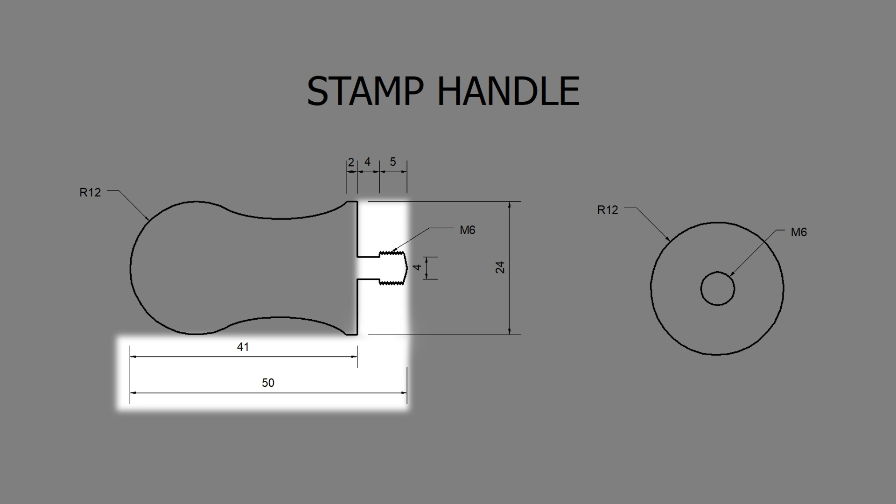Secondly, I would keep the measurements of the length the same. So a total of 50mm, but the main handle just before you get to the shoulder is 41mm. I'll talk you through why that is a little bit later. But yeah, it's quite interesting with regards to the domed part, the domed end.

With the domed end, this is actually a two-part process if you've got a dome part of your design. So if I show you here on the screen, you'll see that the lathe would cut the first bit, which is the thread part and the side profile, and then it would part it off all the way across the end, leaving a nice flat end.

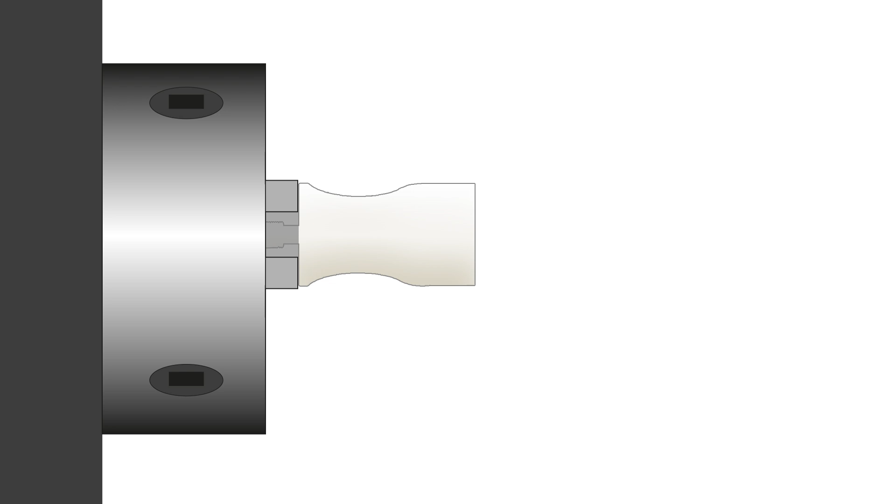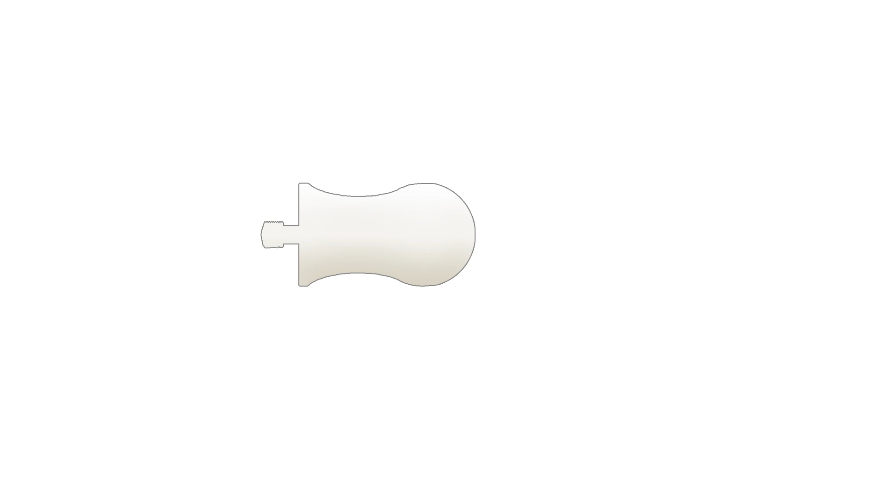And then essentially what you would do is turn that around in the lathe, and we're going to screw that into a little jig which goes into the chuck really nicely. Then you run a second program, which is the dome. I'm also going to show you how to create that dome program as well. So that's the reason really why we would keep the measurements the same, because it just makes our jigs work and everything will work really nicely.

So opening up TS Design, you should all be familiar with how the program looks when you first open it. It's a standard A3 document, and you've got these little dots every centimetre. What we're going to do is change the way this looks so we can get it pretty much looking like what Boxford Design Tools looks like. It makes it a lot easier to design these kind of side profiles for the lathe work.

So first thing we're going to do is in the top here, there's a layout button, the little blue box. If we hit that, you can see that the document is at the moment a standard size and classed as A3, and that's where you would have picked all your A sizes. But for this, we're going to make the document size the same measurements as our metal. So if we go down to user defined and click on that, you can now input the X and Y dimensions for the material size and the design guide.

Design guide is literally just to help you on the screen, so I normally duplicate both of them in here. With regards to the length of the material we'll be using, we will be doing a 50mm billet by the thickness of 24mm. So I'm just going to repeat that in these boxes and hit OK.

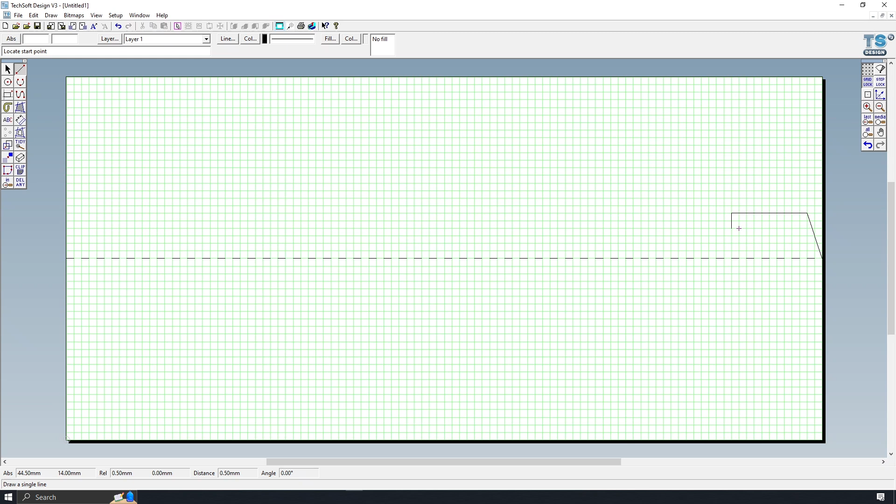The threaded section lasts for 5mm, so I'm going to go across for 5. Just making sure it's nice and straight. That's it. And then it goes to a thinner section, which is 4mm. So we're only going to go to 2 on this side. So it's 1 and 2. So it's only 1mm down. That's right. And that will go for 4 mils. That's 4mm. Then the shoulder of the handle goes all the way up to the top, and then there is a 2mm rim, so there's 2mm there.

So like I said earlier, on the other end, where we're going to have a dome, we're not actually going to draw in the dome at this stage. That's going to be for the second program we're going to run. So for this one, we're going to actually just leave it nice and flat. If we was to do a perfect dome, it's a radius of 12 mils. So actually what I will do is I will do a line from this edge to this edge, just so I can know where my 12mm dome will end. Okay.

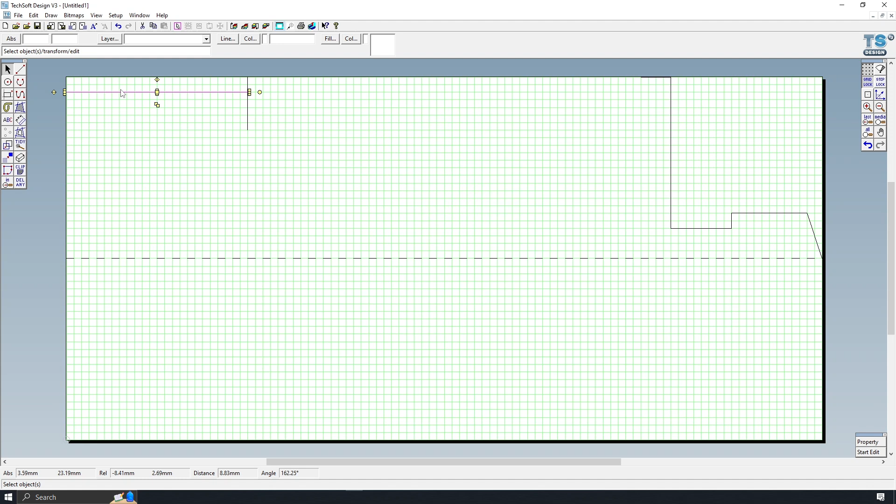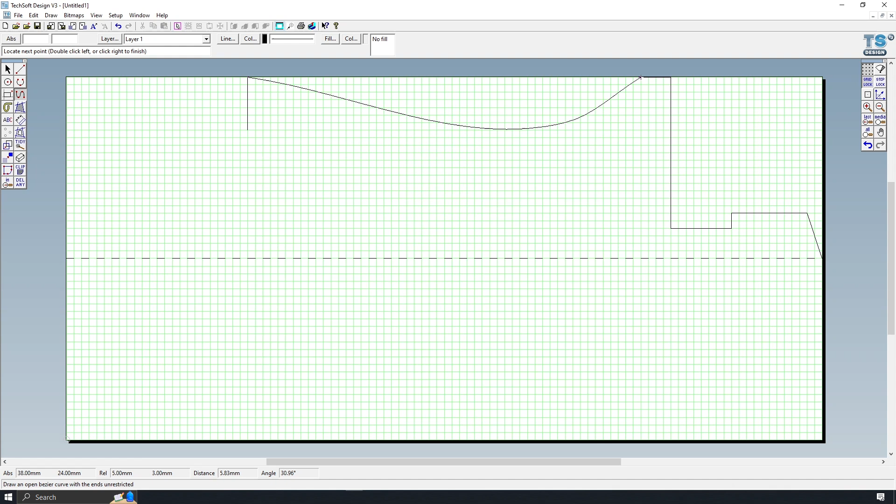So if my dome ends there, I know from this section to this line here, I can start doing my curved arc. So for this one, I normally pick the curved path tool, and I'm going to select just there, work out how far down it will go, and then tally it up just there. That temporary line there again, just as a reference, I'll delete it now. Okay, so we've got the shaft part, the threaded part, the shoulder, the curved part, and we just need to box this off now at the end. So I'm just going to go straight across and then straight down.

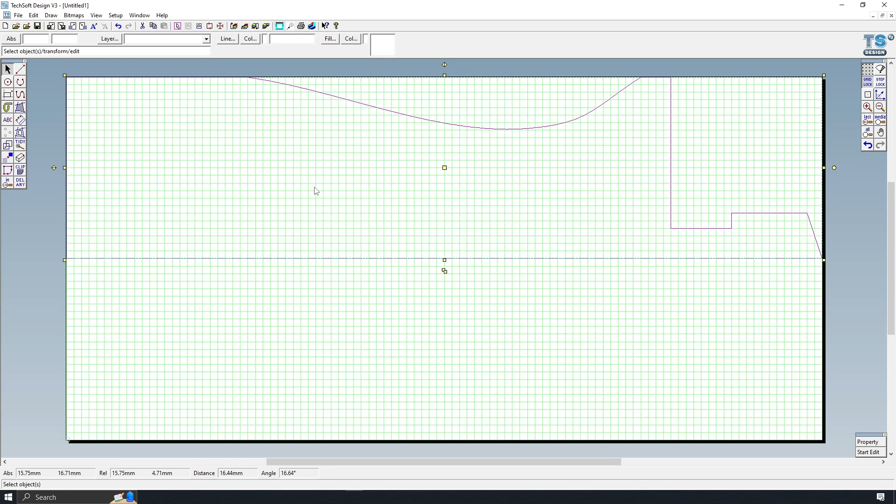So essentially this is all done. There's a few little tiny steps to do, but it's quite hard to see the profile of just half of a side. So what you can do, if you select it all and group it—I use Control and G to group—you can then copy the file, drag it down to this bottom half, and just flip it.

So that will give you a really good view of what it would look like with both halves completed. By using this mirrored image, you can also double check your measurements, physically drawing lines to lines just to make sure your measurements are exactly what you need them to be. It's a great way of double checking. Just make sure you delete them after you've drawn these lines.

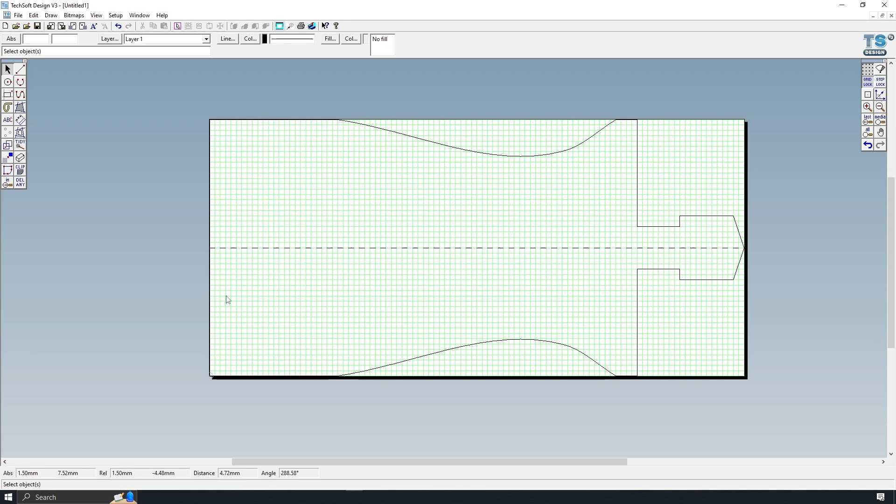For the actual DXF file, it won't actually work if you have this bottom section in the image. So I'm just going to delete it again, and now I'm going to ungroup it with Control and U for this purpose. So we've got our lines separate.

The last thing to do with this file before we can export it as a DXF file is that all of these individual lines are separate—they need to be one continuous long path, excluding that center line. So what I'm going to do is select it all, but then deselect that center line so everything else is selected.

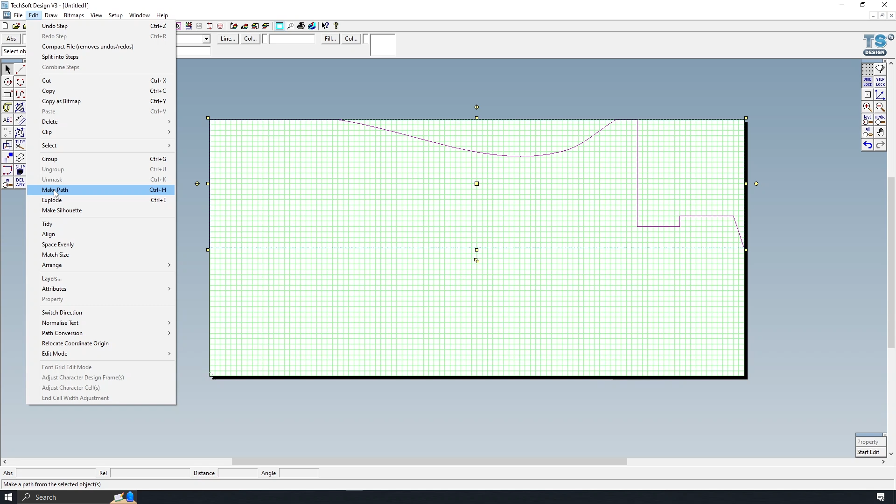There's a great tool up in Edit. If you go down and find Make Path, or the shortcut Control and H, it basically warns that the Make Path function combines selected objects into one path, and that's exactly what we want. So I hit yes, and it says Make Path Complete. Now if I select one part, the whole thing is just one line, which is exactly what we need.

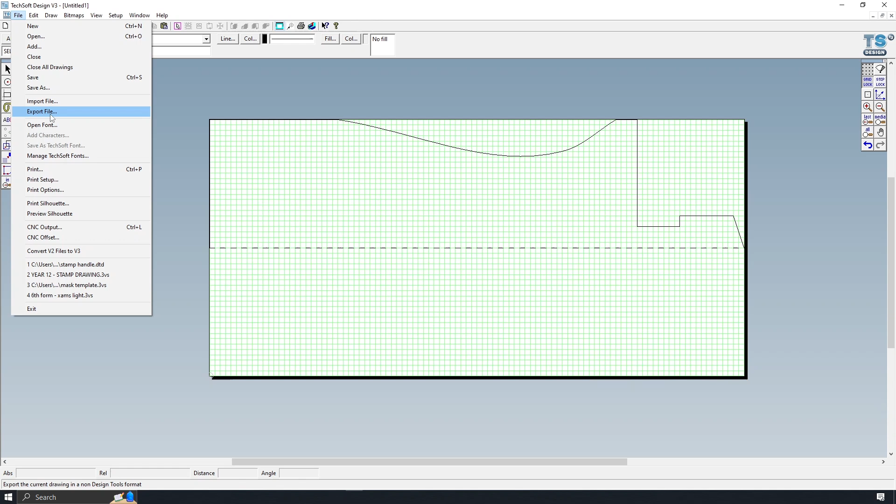And now that file is ready to export. So to export this file correctly, you're going to go up to File and find the Export File function, and find where you're going to save this piece. Just on the bottom here, you can select from multiple different file types, and what we're looking for is the DXF file. So select that.

Call it something practical, so stamp handle. Okay, and hit save.

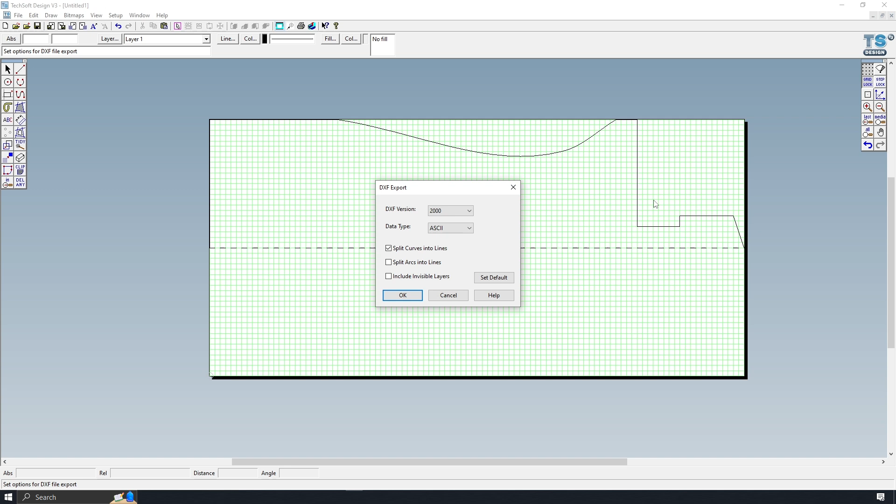The most important part of this is the curved parts won't function properly if you don't highlight split curves into lines. So I'm going to select split curves into lines—everything else you can leave exactly the same. Just make sure you've ticked split curves into lines, otherwise you'll get part of it imported and nothing else will work. So then hit OK, and our file is exported safely.

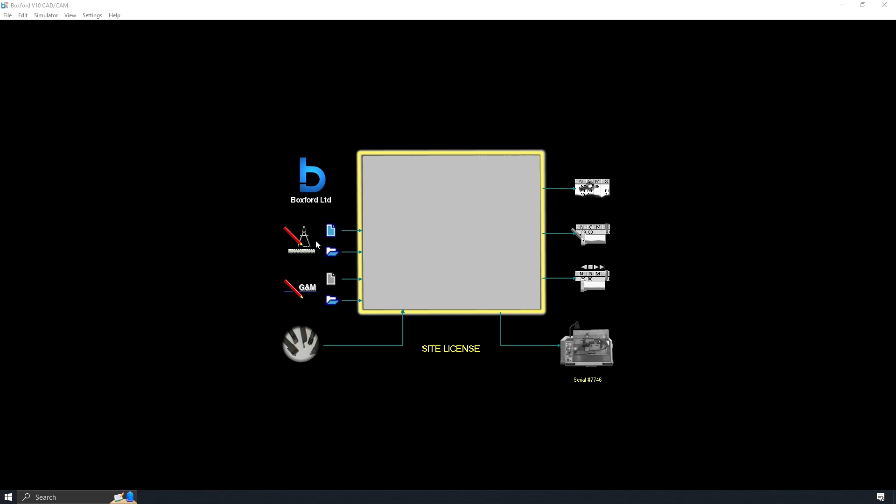So for this one, we want to open the imported DXF file. So we're going to hit open on the drawing here. At the moment, we've got the folder that we saved our drawing to, but nothing's there—that's just because of the type of file. We just need to bring up the drop-down box and select DXF imports, and there you can see the stamp handle. Click on that and hit open.

It's brilliant. So this is a part where we just need to give it a little bit more information if it hasn't dragged the right bits of data from 2D Design.

So first of all, it just says component information. I might call this Year 12 stamp handle, created by Mr. Fay. The outside diameter is picked from our drawing, so that's fine. Inside diameter is only if you're working with a previously bored bit of metal or a tube that has a hole running through it. The length we know is 50 millimeters, everything's metric, and the hole depth we don't need to worry about. We'll hit OK.

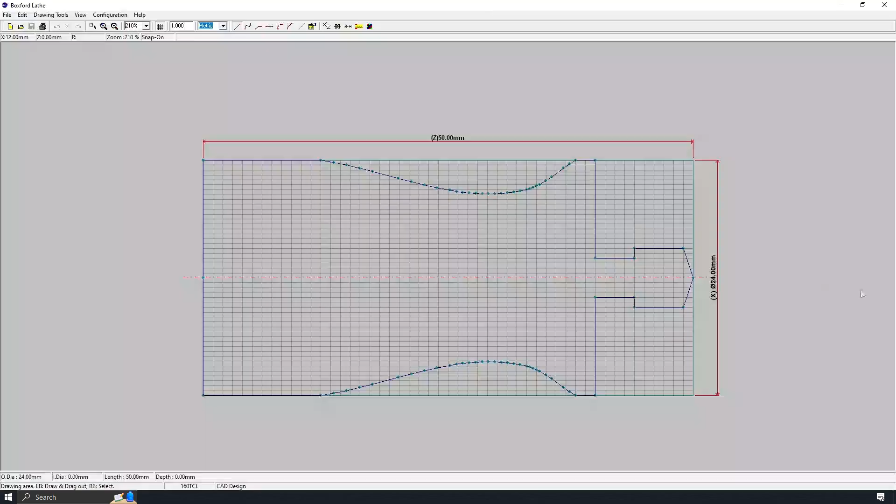Now you can see our 2D design file has been created in Boxford Design Tools, and this is going to be a really nice way of quickly turning it into a G-code file to run on the lathe. Like I said at the start of the video, the threaded part isn't actually there - this is just a block of 24mm thick acetal. We need a way of adding that thread onto this edge.

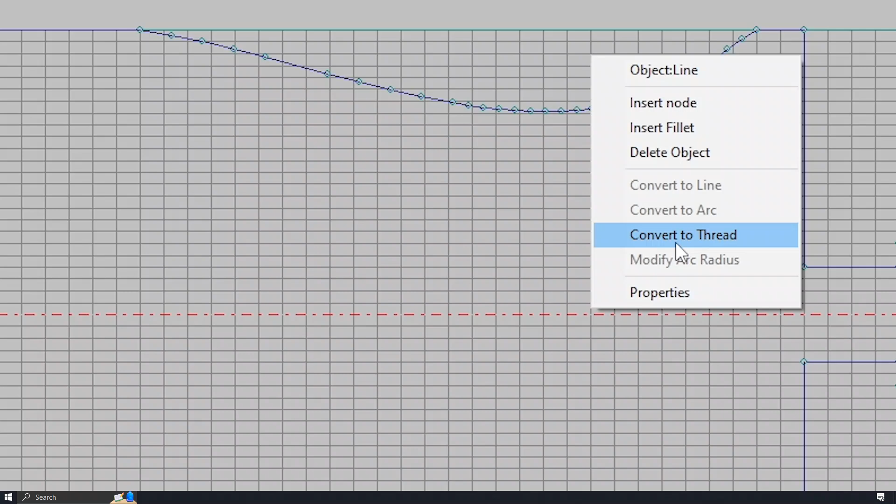So really nicely, if you right click on the line where we want to add the thread, there's an option that says convert to thread, and this is where we can add in a bit more detail. For a 6mm thread, the pitch will just be straightforward 1, so we're going to do 1 mil thread pitch, and then thread specification.

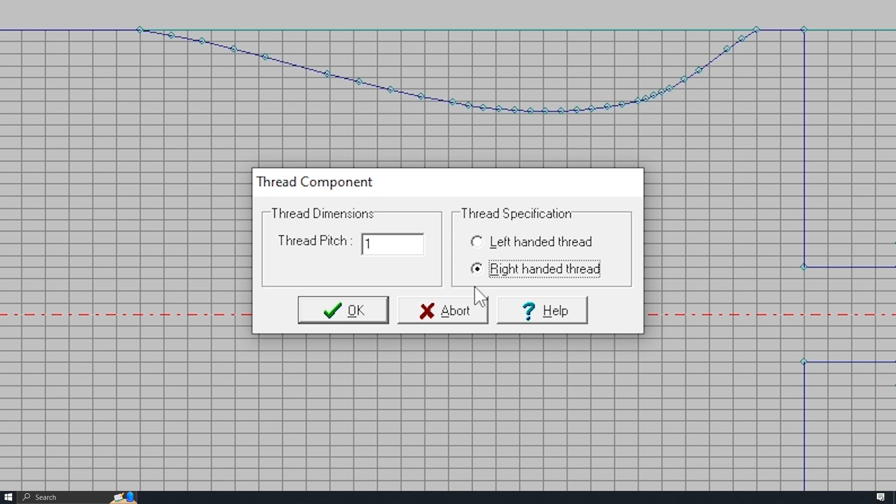You can have a left-handed thread or a right-handed thread. Left-handed threads are normally used in a process where you don't want it to undo while it's being used - quite commonly your pedals on a bicycle would be left-handed thread, so as you're turning the cranks and riding, the pedals won't just fall off. But for this we just want a common right-handed thread, so we select right-handed thread and hit OK.

Now you can see that the thread is visualized just on the edge here, and I know that's all to the right measurements for the M6 negative thread. The dotted line just to the side of the thread is a clearance zone - when the lathe cuts the thread, there's going to be part of the tool sticking out on the side, so there needs to be a little bit of clearance. You can see in our file that the clearance comes up a little short before our line, so we know we've got enough space there.

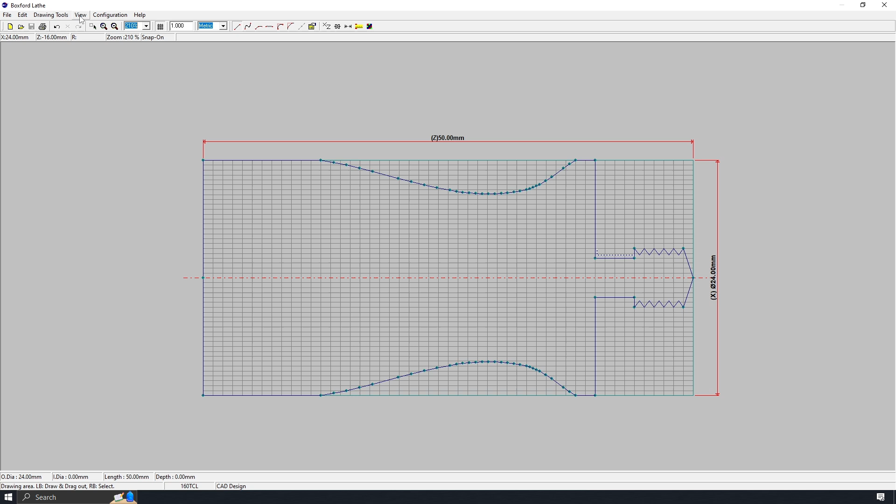Now we've got this drawn up, we're able to use Boxford to give us a 3D representation of what it will look like. If you go up to View on the top menu and go to Launch 3D Render, a window will appear, or it will get you to save the file temporarily before it throws up this window. It's spinning aggressively, so just press the letter F on the keyboard and it will freeze it. I'm going to bring this up nice and large and drag around.

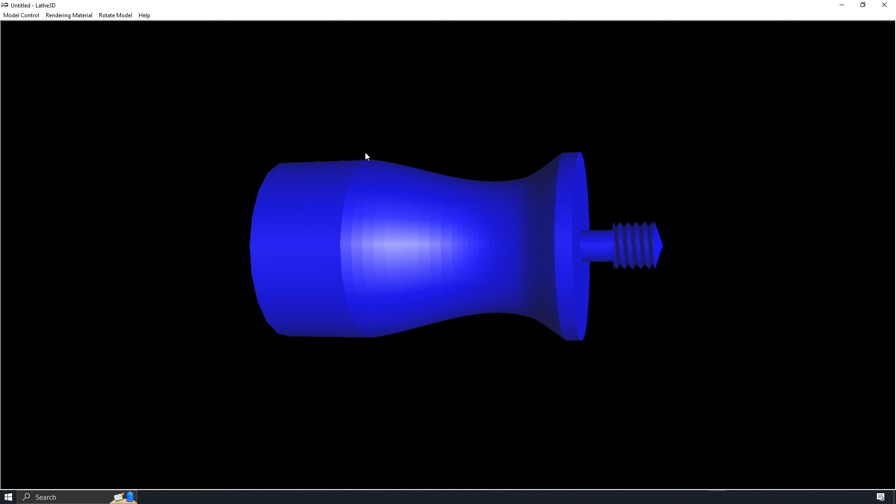Now you can see we've got the threaded section, the thinner 4mm shaft area, the nice shoulder which goes right up to the edge of the piece, then the arc, and then the flat side, which, as I said, we're going to do as a separate profile - I'll show you how to draw that out last of all in this tutorial. But I'm happy with that, so we can shut that down.

Before we hit process billet, where we'd process this into some G code, I'll explain one problem we will hit. If you imagine a cutter cutting all this material away on a spinning bit of plastic, and it gets down to this end where it's going to do a final part off - at this 0 line, that's exactly where the chuck will be. So we don't want there to be any nasty cutting happening with the cutter going straight in and hitting the spinning chuck. We want to give a bit of extra space onto this end.

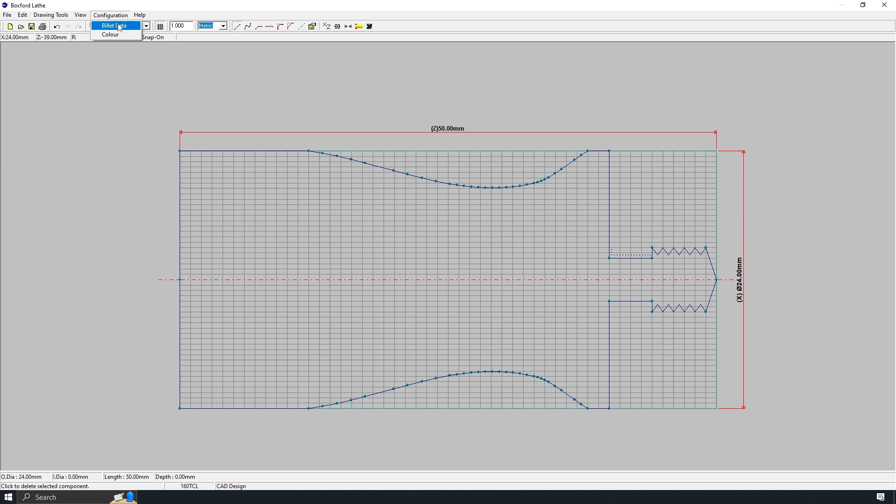Normally I round the number up - at the moment we've got 50 millimeters length, I'd add another 10 mil onto there, so a nice round number of 60 millimeters. So if I go up to configuration here and go to billet data, we can enter the length and diameter again and make some changes. Where it says 50 millimeters length, we're actually going to go to 60 millimeters now and hit OK.

I'm going to zoom out a little bit, and now you can see it's added 10 millimeters just on this end, so there won't be any crashes - there'll be a nice little bit of material before the chuck.

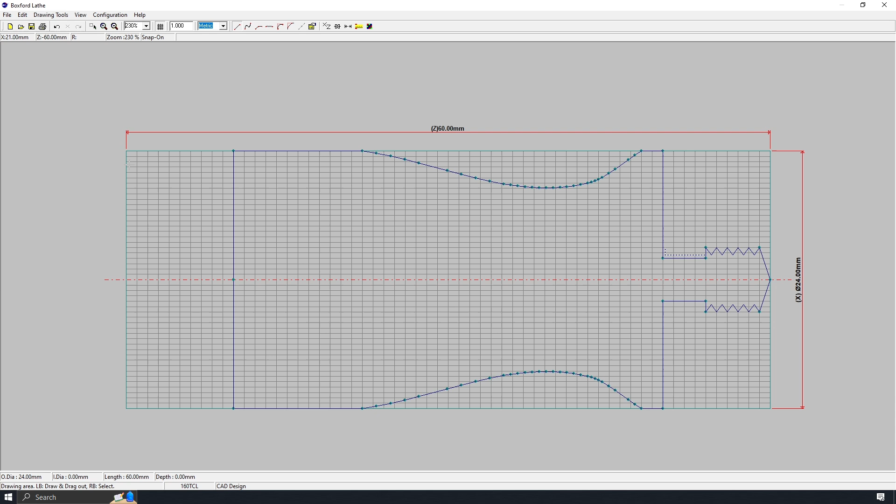Now we are ready to process the billet, so we go up to File and Process. Basically it's saying, if you haven't saved it already, I've made some changes, so do you want to save it? I hit yes.

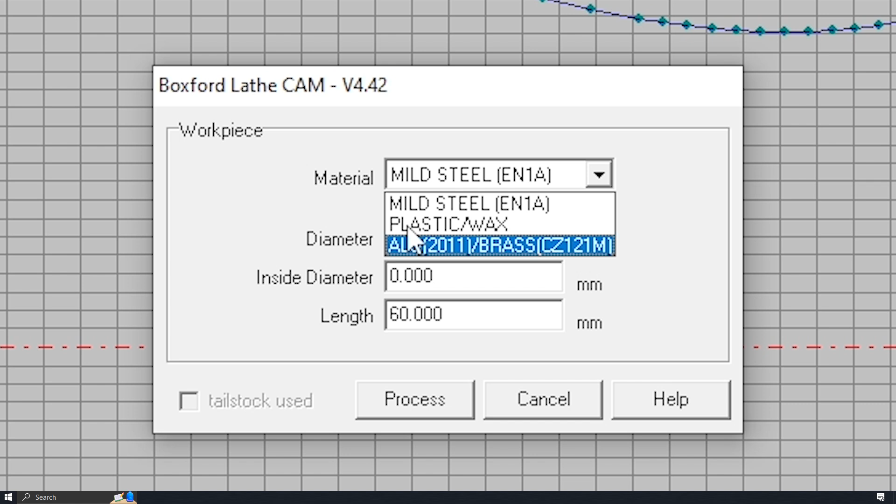So then this little window comes up. This is where you get to add a little bit more data so the lathe knows what it's dealing with, even regarding material. So you've got a selection of mild steel, plastic or wax, and aluminium and brass. So each of these different settings will set the lathe up in different ways.

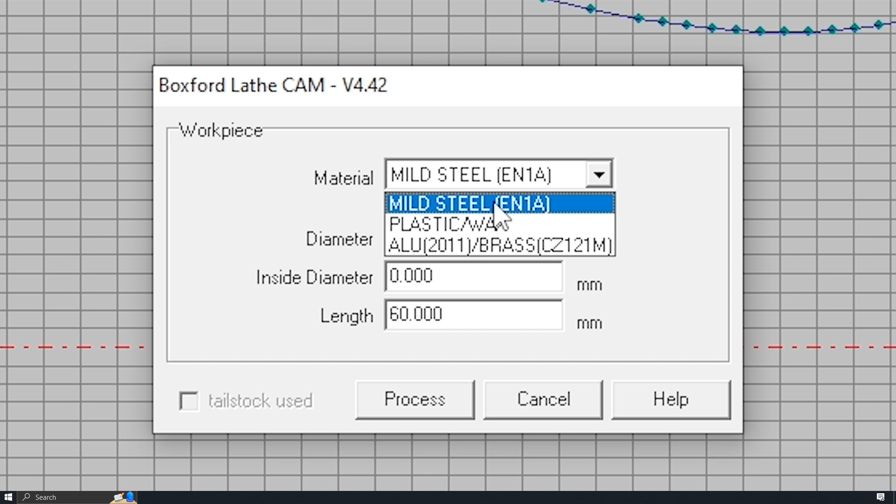It'll do different depths of cut, different speeds for feeds and cutting speeds to match what's needed. So with something soft like plastic, which we're using, it'll do more of a chunkier, thicker cut, rather than mild steel where it'll do very fine cuts, because obviously it's a lot harder material.

So we hit plastic, we just double check diameter and then length's okay, that's good, and we're going to hit process. It's going to ask you to save the G-code file. I've obviously done a test before, so it's asking me if I want to replace it.

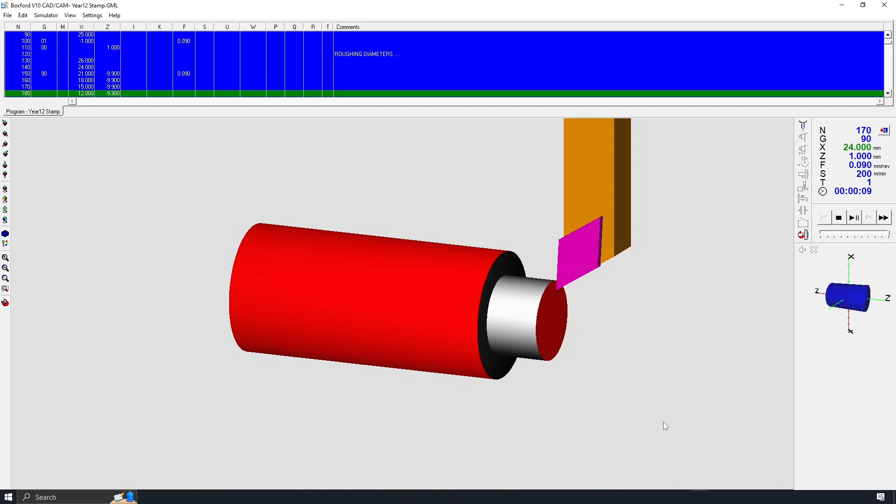I hit yes. So now it's going to run a program, and you're going to see it on the screen on the visualizer of all the cuts it's going to do. At the time it's doing this, it's writing all the G-code out at the top here.

So you can see it's done its roughing cuts and it's done its fine finishing cut. It's clearing some material out with the parting tool, then it's got a left-handed cut going there. Thread cutting tool is doing the thread.

Okay, and then it should be the final parting off with the parting tool, and then back to the original tool. So during all that time, it's written all the code out.

As an example, to do all of that process, if I go all the way down to the bottom, you've got 1,950 lines of code to make this to where it's at the moment. So you can sort of see the program was doing a lot there to create the code.

But it hasn't thrown up any conflicts. It hasn't said, well, a certain tool couldn't get into a certain area. So we're all nice and safe with that.

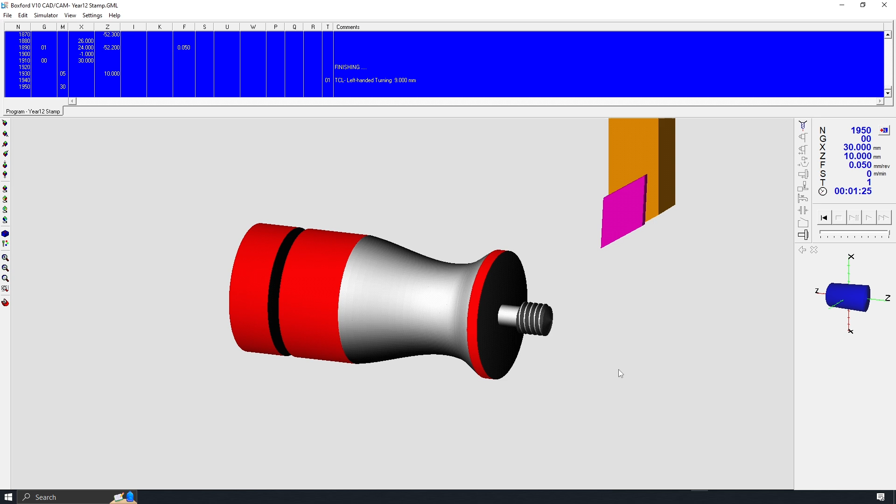So we can close this one down. And you can see the little visual of our files come up in the middle, which means it's all ready to send to the lathe. So down in the bottom here is a manufacture little lathe button. You would click that to send it to the lathe, and we'd get manufacturing with this part.

But like I said, we've got the other part, the domed part that we're going to create. So for that, we're going to go back to 2D design, and I'm going to show you how to create that now.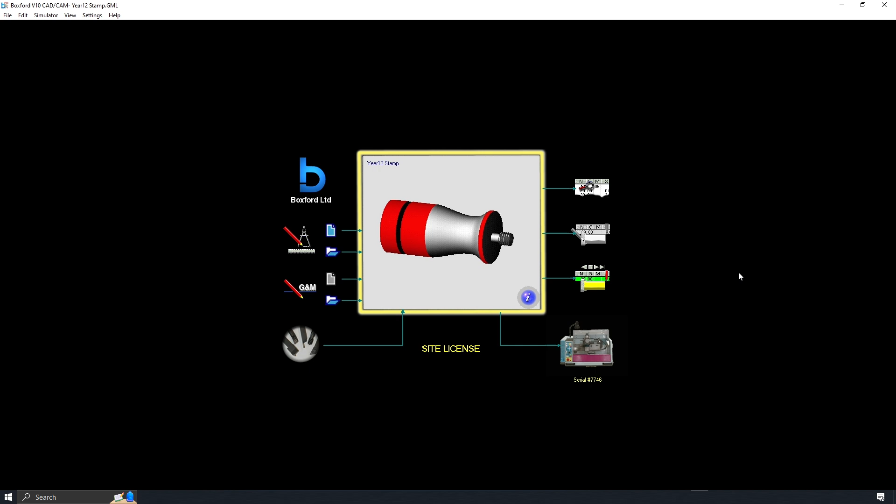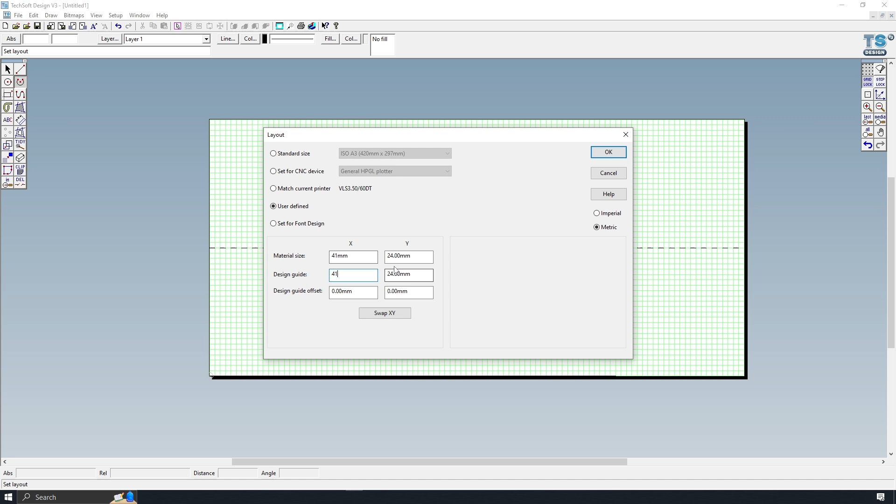So we're back over to 2D Design, and I've got my file laid out exactly how I did before. But actually for the domed end, for this file, we're actually going to change the size of the document, because we actually want it to be a length of 41 for this one. This just allows everything to sit in our little jig in the lathe correctly, and it cuts the right amount off. So 41.

And as I've adjusted that to 41, I'm just going to change the length of the center line. There we go.

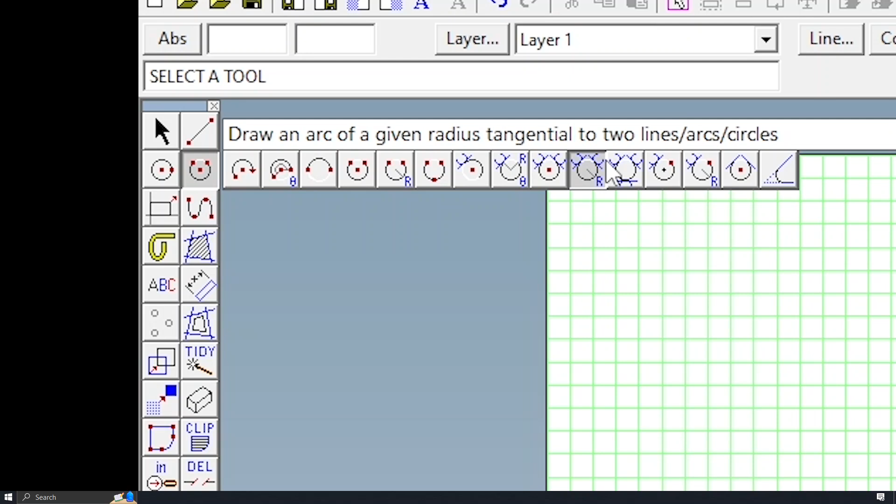Okay, so for the dome, it's going to be a straightforward curved line just from this end. I'm going to show you a nice easy way of doing that. So with regards to the arcs button just on the left here, if you press and hold it down, it'll give you a lot of different options. And we're going to go to the draw a semicircular arc locating endpoints.

Okay, so as an example, if I was to draw from the bottom to the top, you can see it's going to draw a really nice arc to the measurement that we want. But I want it to be exactly on that 12mm arc line.

So I'm going to use my line tool to find my 12 mils. So it's just about there. I'm just going to delete that one. And now I know where I'm going to drag from and to. Actually, if I make this longer, because we're going to do it from this bottom side as well.

So now we're going to click that arc selection that we made earlier on.

So I'm going to find right at the edge of the material, click there, and drag up to the top. Brilliant. And then that first line, I'm just going to delete because we don't need that. Let's have a look - that's really good.

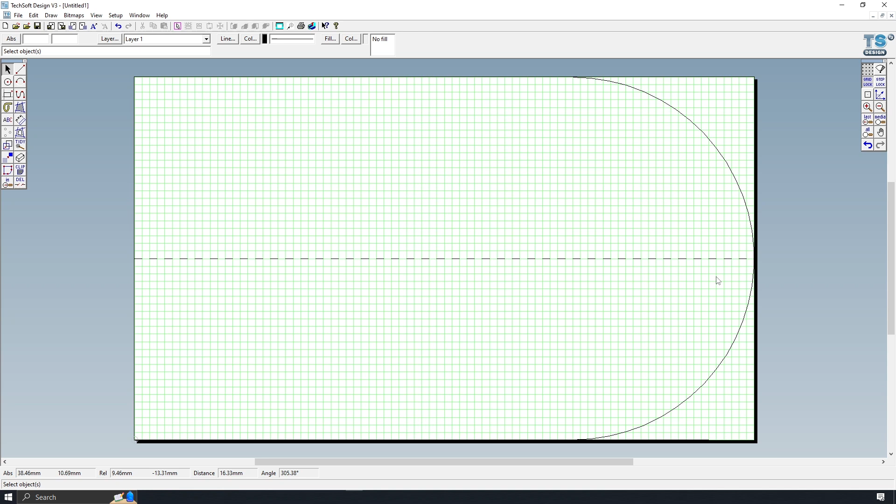And just one other thing - we're not actually going to need this bottom part again. So in the delete button at the bottom, if you hold and go over to the one that has two little red lines inside and select that, you should be able to go over to that other part of the arc and just click on it to make it disappear.

Last little amendment I'm going to make is just at the end of the arc - I'm going to add a straight line going for probably 2mm. It helps things work a little bit more efficiently. Let me just double check where it goes to - it goes to there, okay. So I'm going to go 2mm from that edge and just add another little line. You can see I've added another little section on there.

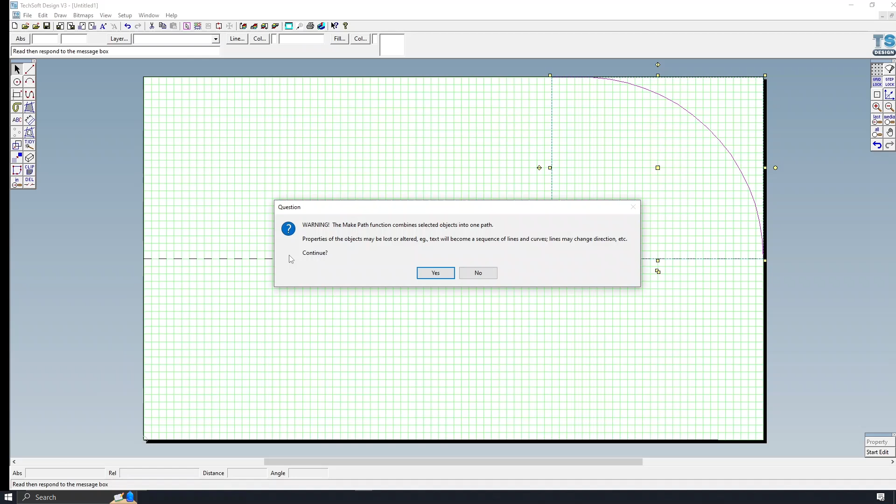As before, these are two separate lines, so we need to make them as one. I'm going to select both of them by holding down Shift and clicking both, and then we're going to go to Edit and then Make Path. Hit yes, and okay - so that's now one nice curved line with the extra 2mm line.

We don't actually need to carry the line down to the end, so it does actually just end there. It's something we don't need to cut any of this, because remember our profile's down here, so it would just be cutting mid-air. We don't need it to cut there. So that is what we need.

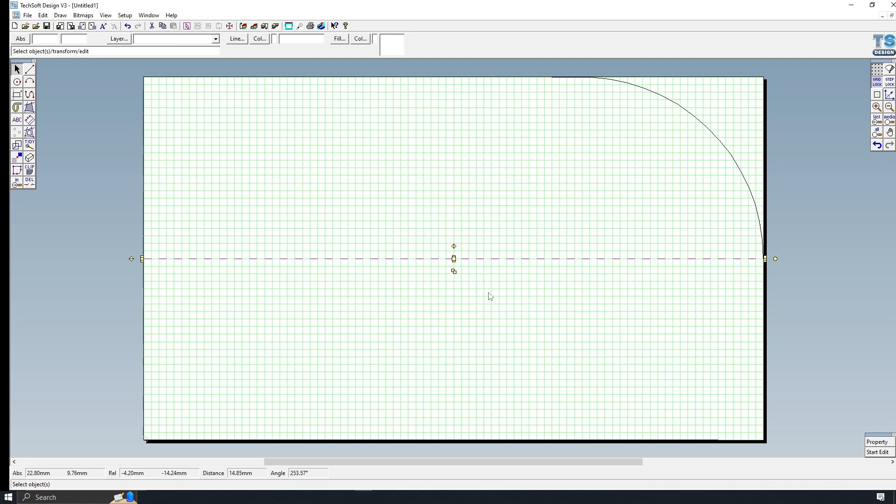Obviously our two lines aren't grouped, which is good, and we can then save that as a DXF file. So going up to export file, we're going to call it stamp dome or stamp handle dome. Okay, just make sure we're saved as a DXF file and hit save.

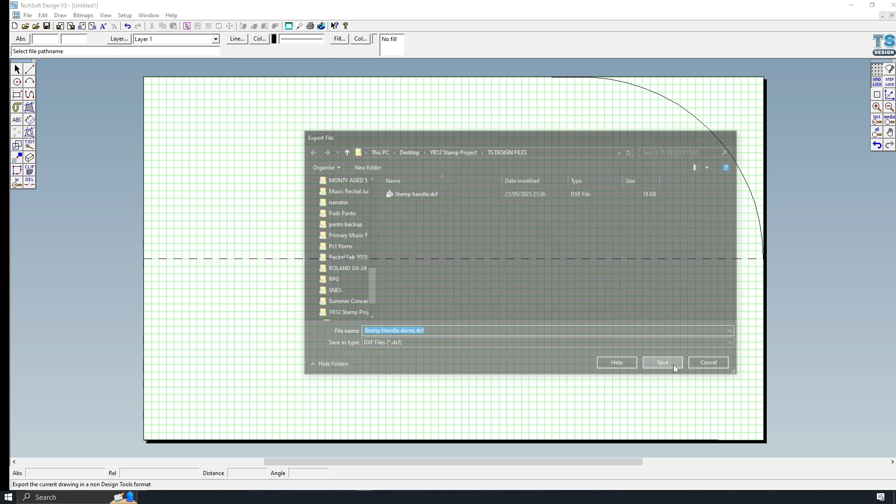Split curves into lines again - really important we do that one - and then hit OK. Brilliant. Now over to Boxford Tools.

So we're back over in Boxford, and we're going to open up the dome file that we've just created. We're going to find the DXF import and click the dome file. Okay, and we're going to call it stamp dome, created by Mr. Fay. Outside diameter 24.

Yep, so in the length it just says 14mm - don't worry about that at the moment. It's only because we've only drawn a dome which was the 12mm radius plus the extra 2 millimeter line. So don't worry about that at the moment. It says 14 - we're going to hit OK with this one.

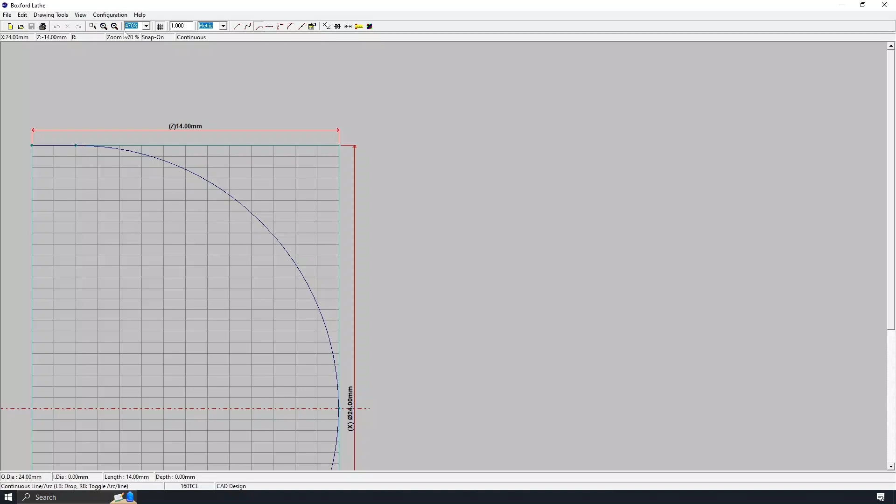And I'm just going to zoom out. So now you can see it's just got the doming part, which is the 14mm section, and exactly how we need it.

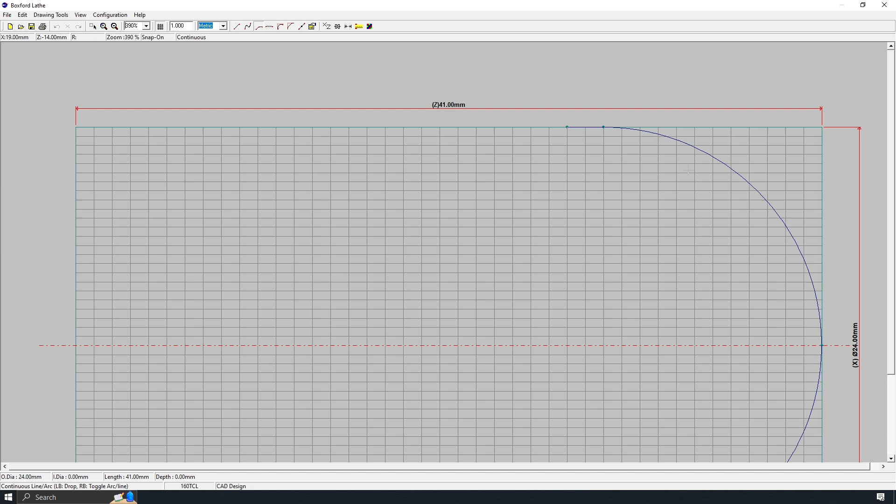For this, we're going to change now the length of the billet to 41, because we want the 41mm length to make the jig work. There we go - I'm just going to make sure I don't draw anything else.

Brilliant, we can do the launch 3D render again, so I'm just going to hit OK with that one. And you can actually see that it's just the domed end that we're working on. Absolutely fine.

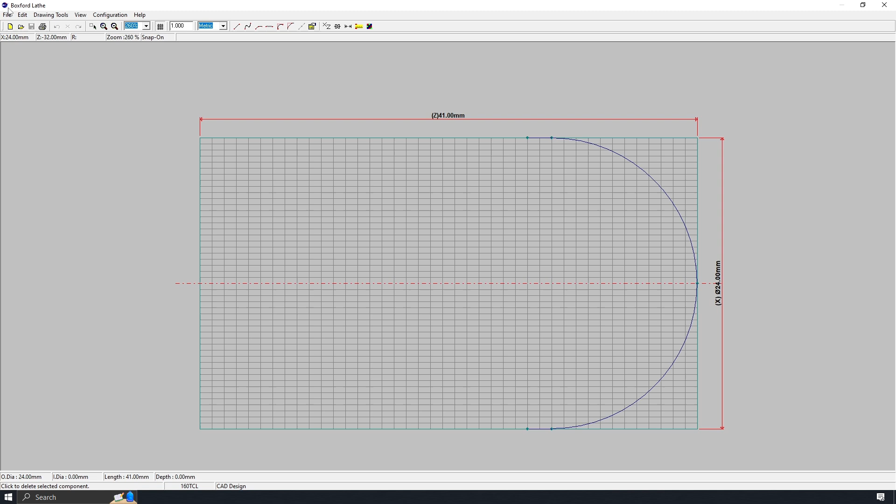And knowing that we're at 41 and 24, we're going to process this one with the plastic and wax at those measurements. Hit OK. And you'll see it run the program again.

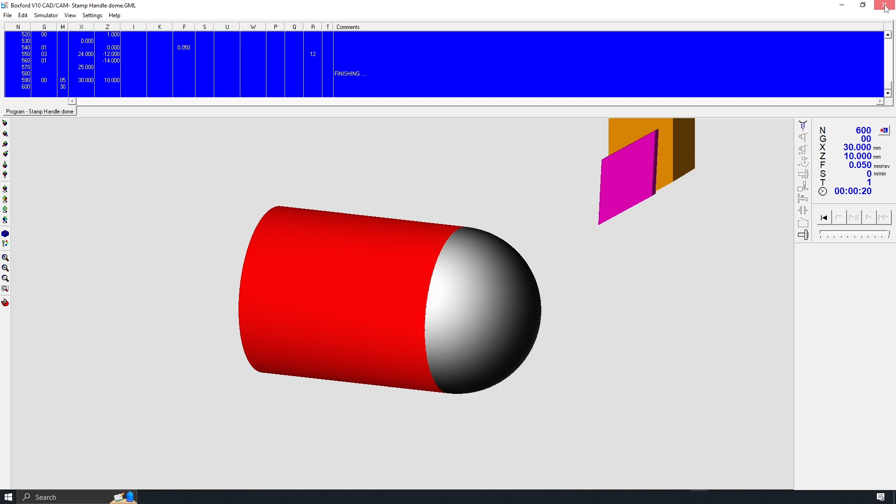So you can see it's created the file - just to do the doming, that's 600 lines of code there. So you can see even to do something relatively quite simple, there's a lot going on in the background. I'm just going to hit the X to close it, and you can see now we've got the file up there ready to set up in the lathe and send and manufacture it.

So I hope that helps - creating an initial drawing in TS Design and then bringing it into Boxford design tools to create the actual G-code file to allow the lathe to work to manufacture the piece. If you do want to watch a video of me doing it all in Boxford, so actually the drawing in Boxford, there is another video available, so ask your teacher where that one is. Hopefully that helps, and I'm looking forward to seeing the results. Thank you.